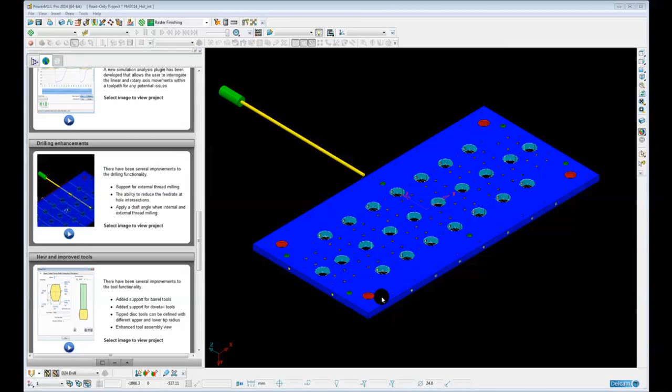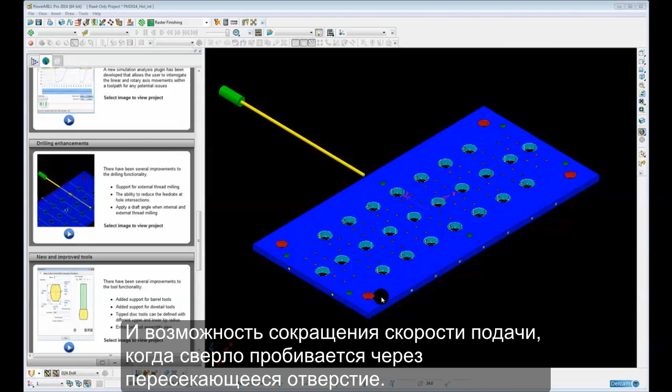There have been several enhancements to the drilling functionality in PowerMill 2014. Included in these enhancements are support for external thread milling using a thread milling tool, the ability now to apply draft to a threaded boss or a threaded hole, and finally the ability to reduce the feed rate when the drill breaks through an intersecting hole. This is particularly useful when gun drilling with small diameter, very long drills.

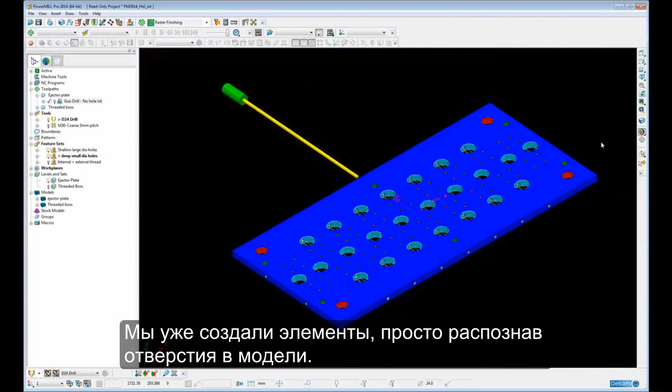Let's have a look at this list of new functionality in this example project. First of all, we're going to look at varying the feed rate at hole intersections. So here we have an example of a mold tool plate, an ejector plate, and we have a series of holes, smaller holes that intersect larger holes. We've already created the hole features by simply recognizing the holes in the model.

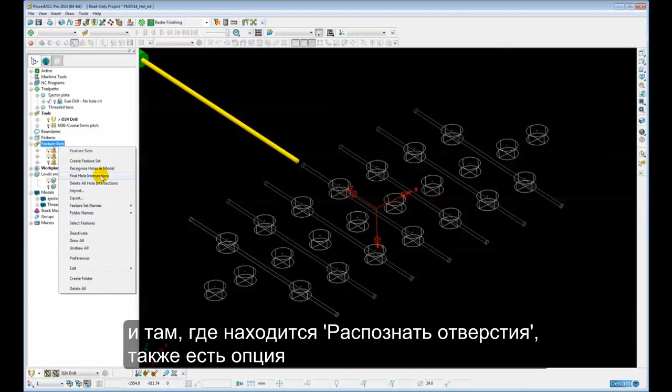Now, before we can apply the varying feed rate at the hole intersections, we need to find all intersections of all holes in PowerMill. This is a simple operation. We simply right click on the feature set. In addition to where we have recognize holes in model, we also have find hole intersections. So this will scan through all the holes and identify and display all the hole intersections. So here we can see the hole features are displayed with the hole intersections.

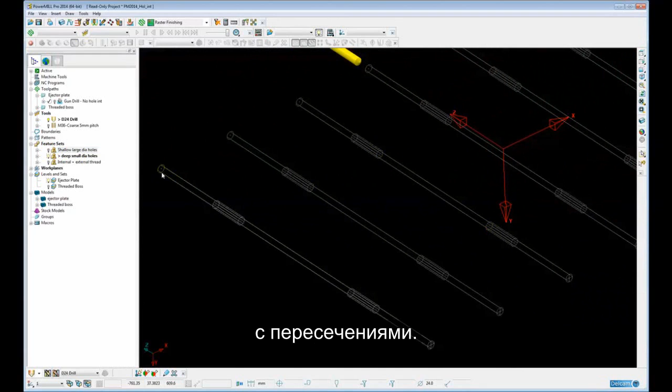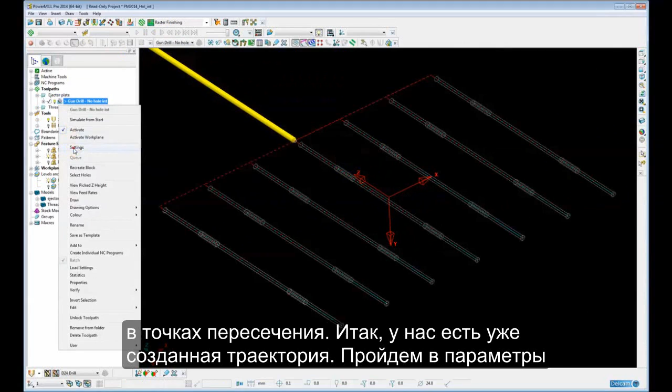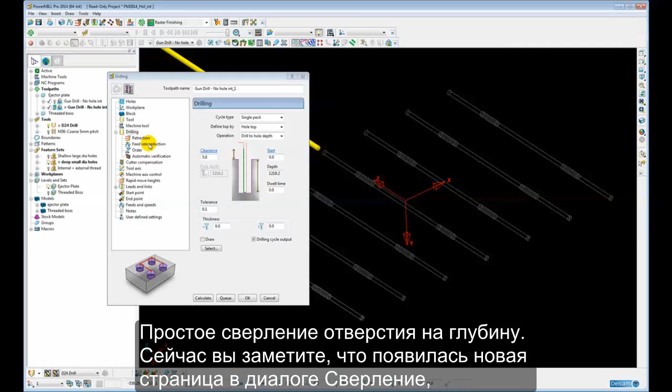So now it's simply a case of creating our drilling toolpath and activating the various feed rates at the intersection points. So I have a toolpath already created. If I go to settings, simply clone that toolpath. So just to show you how we vary the hole feed rates, we're going to create a single peck, drill hole to depth. Now you'll notice there's a new page on the drilling form called feed rate reduction.

So we're going to reduce the feed rate at hole intersections. Now I want the feed rate to be fully reduced at least 5 millimeters before the actual intersection of the hole, and I want the overall distance for the feed rate reduction to start to be, say, 20 millimeters. So from 20 millimeters to 5 millimeters, that's when the feed rate will be reduced, and I want to do that in 4 steps.

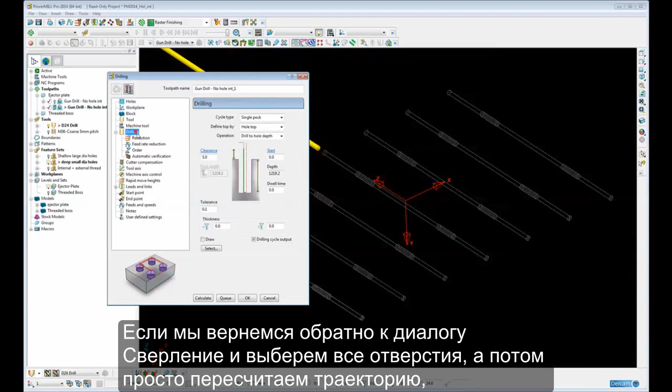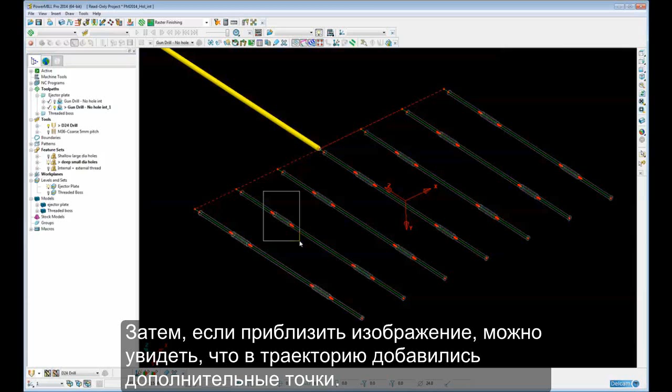And I want the final feed rate to be 30% of the general feed rate, and I want the spindle speed to be 50% of the general spindle speed. So we go back to our drilling form and select all our holes, and then simply calculate the toolpath. So obviously the toolpath doesn't look any different until we switch on the draw points. And then if we zoom in, we can see it's added in extra points within the toolpath.

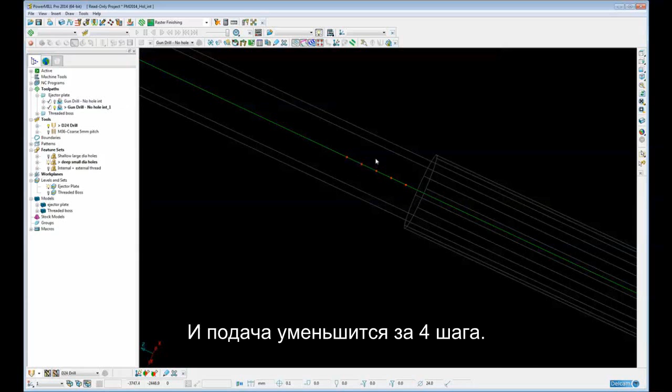So here we see at 5 millimeters before the intersection, the feed rate will be fully reduced, and an extra 20 millimeters on top of the 5 millimeters is when the feed rate will start to be reduced, and the feed rate has been reduced in 4 increments. If we want to, we can go to drawing option, draw feeds, and then we can see the exact feed rates that are going to be used. So our general feed rate is 1000, and we drop down to 30%, which is 300.

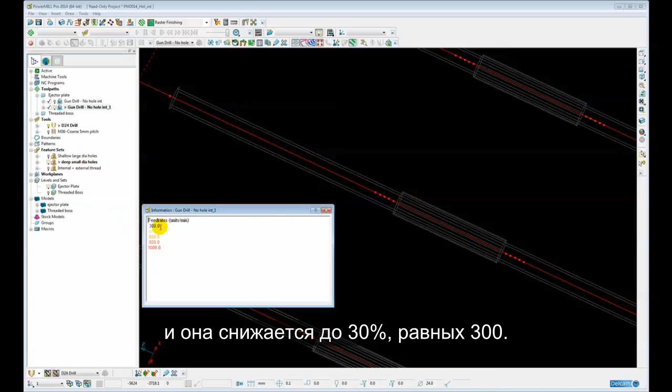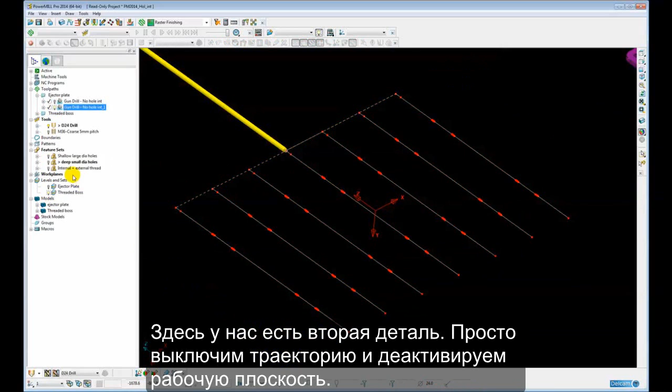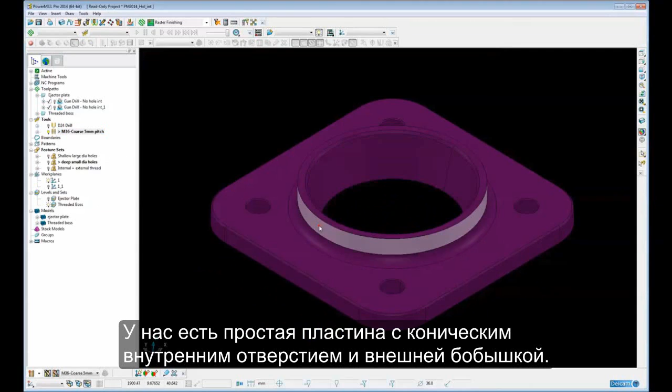The second and third new drilling enhancements involve thread milling. So here we have a second part. Just switch off the toolpath. Deactivate our work plane. So we have a simple plate with a tapered internal hole and an external boss. So we're going to apply a thread milling operation to both of these features.

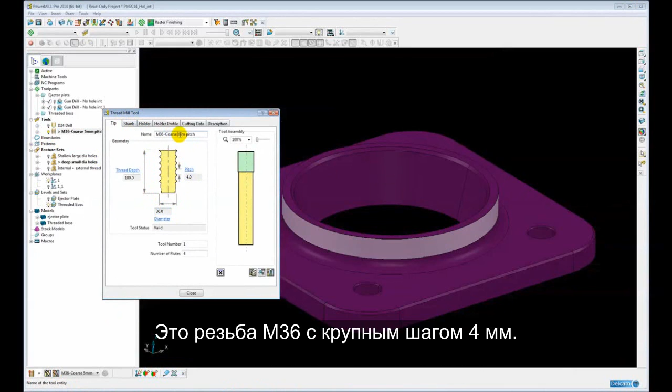First we need to create a thread milling tool. Now I have a tool already created. So it's a thread milling tool with a diameter 36 with a 4mm pitch. So it's M36 with coarse 4mm pitch. I have a toolpath already created to save time. Let's just clone that toolpath. So it's a thread milling operation.

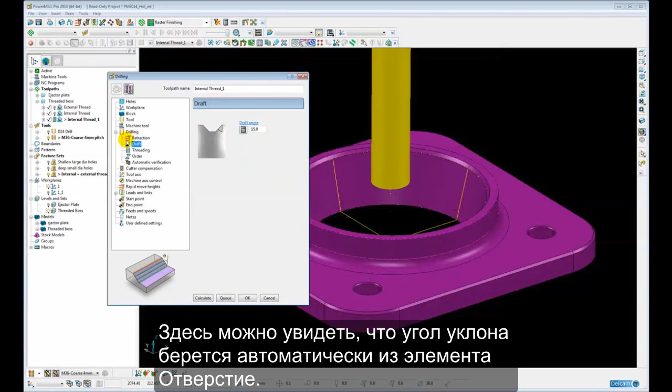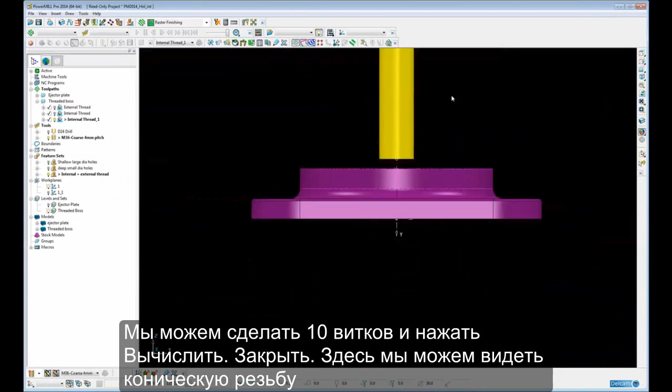And the new feature for 2014 is the ability now to apply draft to these threaded holes. So here we can see it's picked up the draft angle automatically from the hole feature. We're going to do a number of passes, right hand thread with an angle lead in, 4mm pitch, and we're going to do 10 turns and then calculate. Close. So there we can see the tapered helical thread for the internal hole.

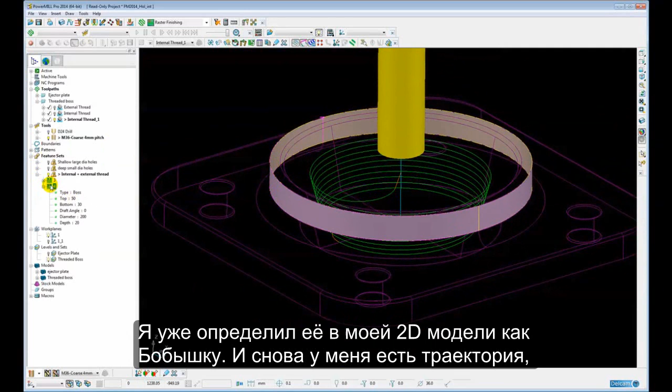To do the thread milling on the external boss, it needs to be defined as a circular boss, not as a hole, obviously. So I already have that defined in my feature set as a boss. And again, I have a toolpath pre-created with all the parameters saved, so I'm going to clone that. And then there's a new type of drilling cycle called external thread. This is new for 2014.

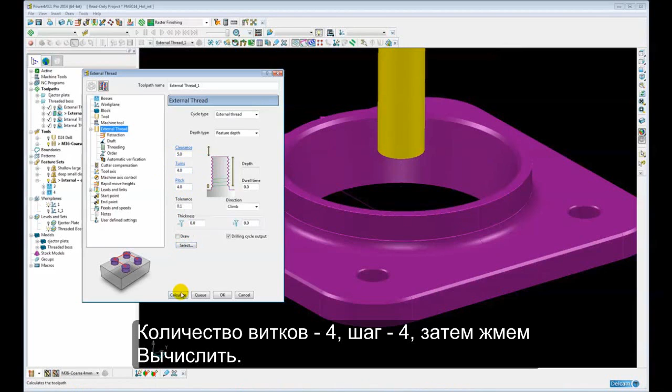And again, it allows us to use a draft angle if we have a draft angle. So number of turns 4, pitch 4, and then calculate. So there we have our external thread milling toolpath.